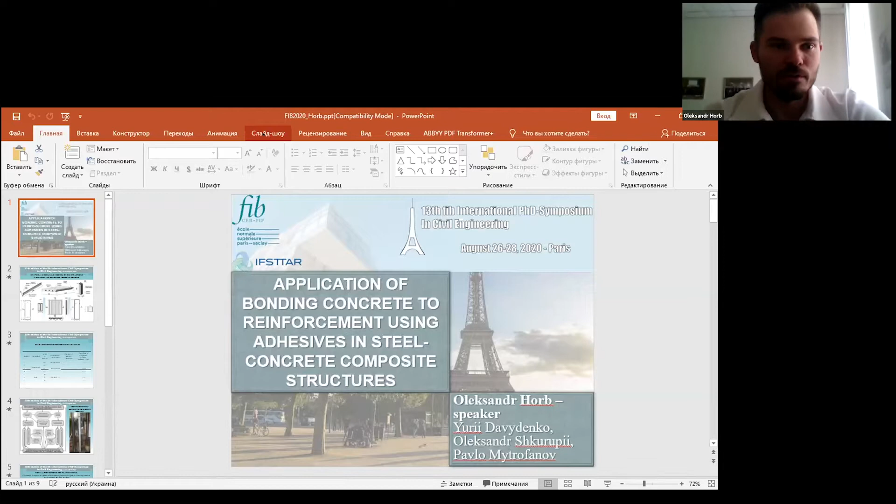And it's a big honor to show these results at such a big symposium, where many of my colleagues can see my results and maybe give some advice for the next research or give some comments on them.

The presentation is called application of bonding concrete to reinforcement using adhesive in steel concrete composite structures. My older colleagues have worked with steel concrete composite structures for almost 40 years. And at some stage, they had a big problem of how to ensure the joint work of concrete and steel in such types of constructions.

We know that in most cases we can use traditional anchoring, traditional external reinforcement or something like this. But it's a very big problem in modern constructions how to get this collaboration, ensuring joint work of such different types of materials as steel and concrete.

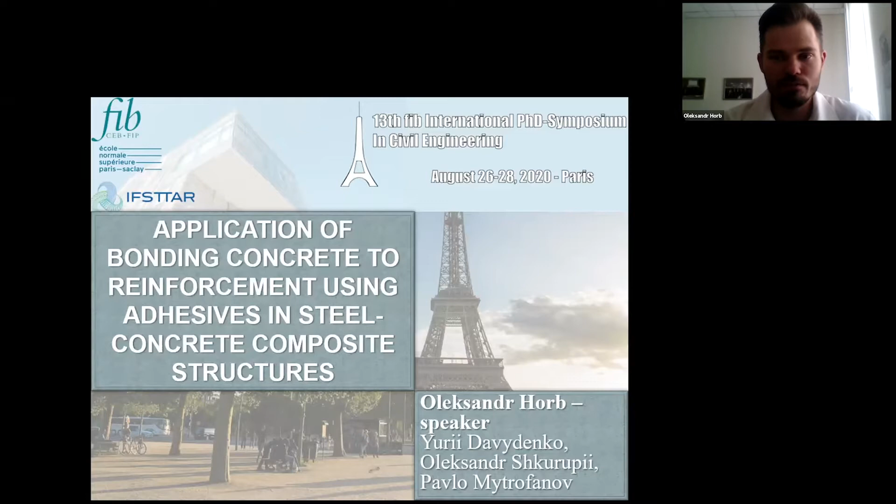Using research of our colleagues in polymer composite materials for different adhesives, we checked a few of them, acrylic and epoxy glues, for connecting. For many years our colleagues have used different adhesives for connecting steel and concrete in different types of constructions, but for ready concrete blocks and external or internal reinforcement, or for making some anchoring. But we tried to create such types of steel concrete constructions in which we can glue liquid fresh concrete to steel reinforcement.

We created three main types of steel concrete composite structures. We can see on the left side a double T profile, 2 meters long, with cavities filled with concrete. Before filling with concrete, we put some glue on the steel, and the next step was filling the cavities with concrete, gluing fresh liquid concrete. We didn't know which result we could get, and it was the first research of this type.

We didn't have any example in world practice of gluing fresh concrete to steel reinforcement. The best results we got when we glued concrete to profiled decking. We got good results; we will see them on the next slides.

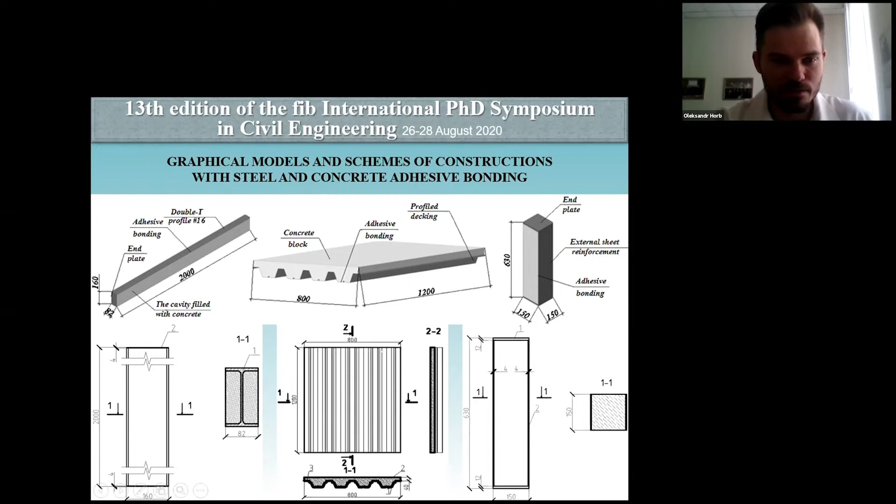And the third type of constructions which we produced were short columns, created from a concrete block and steel external reinforcement. Sizes and dimensions of all constructions you can see on this slide. We tested our constructions in compression and bending.

We divided our samples into a few series which differed from one another by the type of glue connection. In some constructions we don't have any type of adhesive connection, but in others we have some type of adhesive. We use acrylic adhesive, which contains three components: liquid polymer, hardener, and filler as quartz sand of some size.

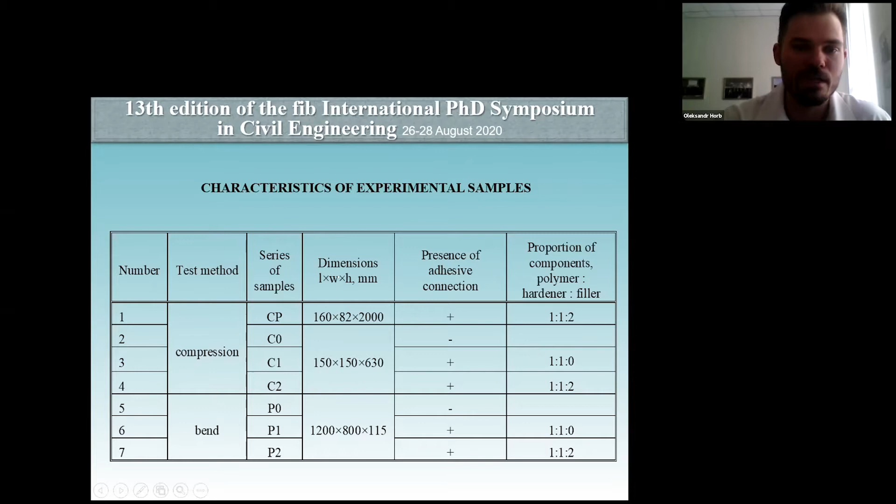I remember 0.315 millimeters. And we produced two types of glue in the proportions which we can see in this table. And the dimensions of samples we can see in this table too.

For all researches, we created a scheme of researches. We provided experimental researches on three types of samples, and then we produced theoretical calculations using different theories and modern and national documents, and decided that the most difficult part of calculations of such type of constructions is to describe the glutinous connection, to describe the adhesive using different equations.

It was the most difficult part in all theories, because according to Eurocode, according to national Ukrainian and Eastern European documents, we talk about ensuring work of steel and concrete on every stage of loading, but we can't describe the third layer in this construction as polymer, because polymer adhesive we can put in this construction having some thickness. It can be 3 millimeters or 5 millimeters, or in some constructions we tried, we put more than 10 millimeters.

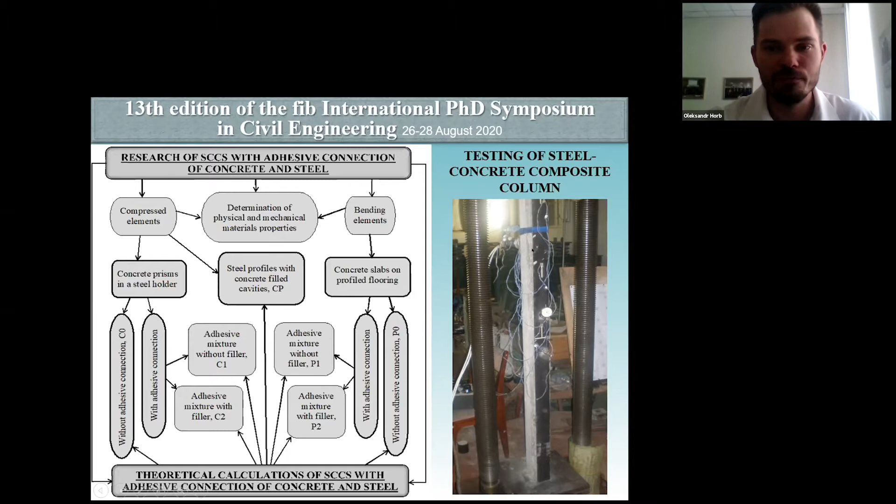You can see on the photo a column, double T column with cavities filled with concrete. And in this way, liquid concrete was glued, was adhesive to the steel part. The most important to us was to check the work of the profiled flooring slab, because we don't use any additional reinforcement in this way. We want to see on every stage the working of steel and concrete without any reinforcement. In this slab, we have only profiled flooring, steel profiled flooring, and concrete block.

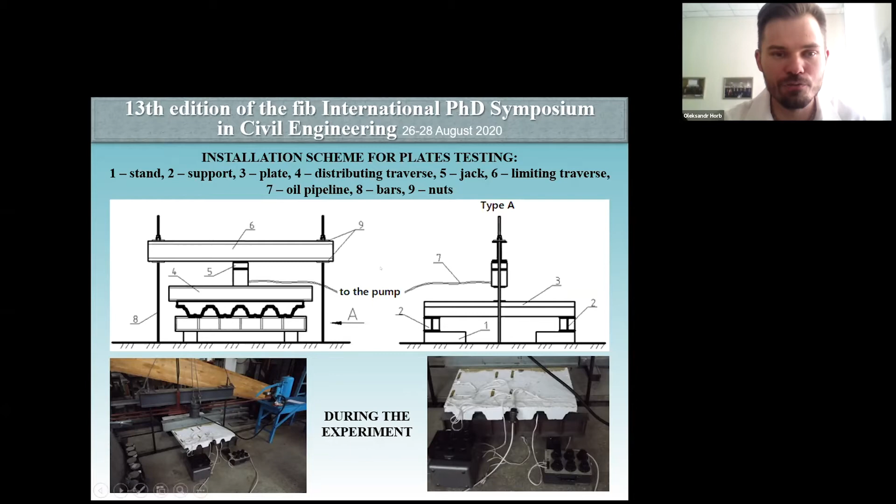And at the time of producing, we put a layer of glue equal to 3 millimeters on the profiled flooring, and then in 30 minutes we added liquid concrete to this slab, and after hardening of 28 days we tried to destroy this construction using such installation, because it was very difficult to put this construction in some mechanical press machine, because we couldn't find such, and we needed to produce some new installation for crashing this type of construction. And we got, I will show you, a very good result for this gluing.

We used some strain gauges for measuring deformations depending on load, and we can see that on each stage of loading, concrete and steel parts are working together, and the glutinous connection works even when we are gluing liquid concrete to steel reinforcement, and we try to prove that we can use this method of gathering work of steel and concrete in steel concrete composite structures.

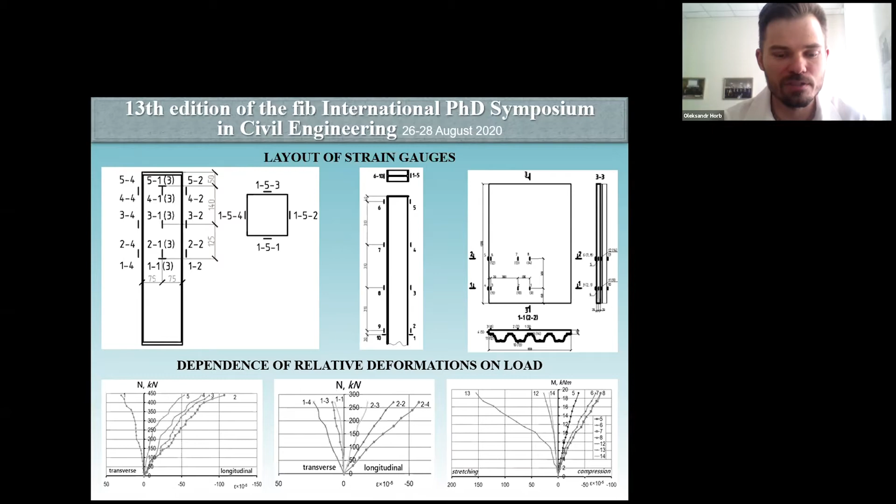As results showed us, if we talk about short columns, C0 is the column without glue connection. C1 is the bearing capacity of the column with adhesive without filler, and the most useful for such type of connection is the type of polymer with one part of acrylic, one part of hardener, and two parts of filler. And the best results we got with this type of glue.

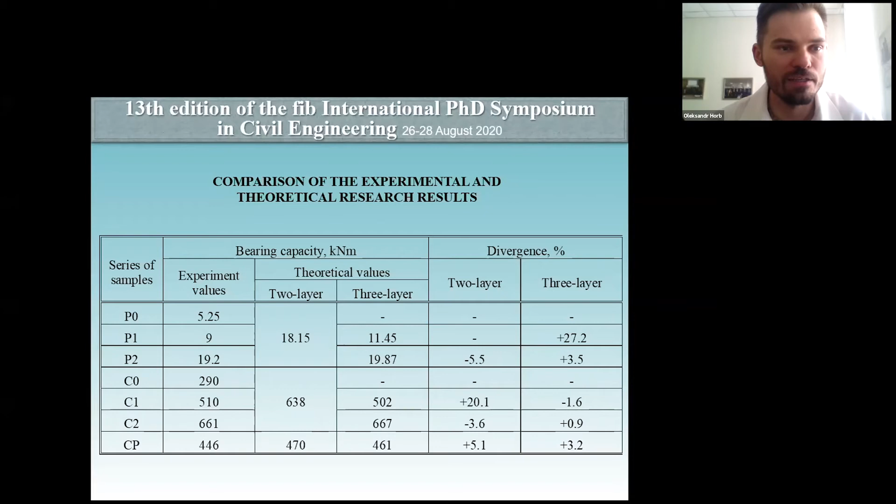I, of course, read your paper as well in the proceedings. I have a couple of small questions. Maybe I can start and other people can join. You correctly mentioned that there are some questions very important to clear up. First of all, the temperature influence, long-term influence and vibrations. The temperature influence is very, very important, because this application is typically for buildings, where we normally need 60 minutes of fire resistance.

My first question, and probably the most difficult question now: what do you guess about the fire resistance of this system, because the heat comes from the steel side, unfortunately.

One slab we left outside in the yard near our laboratory for 2 years. It was under snow, under bright sun, under rain, with water, with freezing, with unfreezing, and when we checked this slab, it was almost a miracle, but bearing capacity of the slab increased by 15–20% comparing with other slabs which we destroyed.

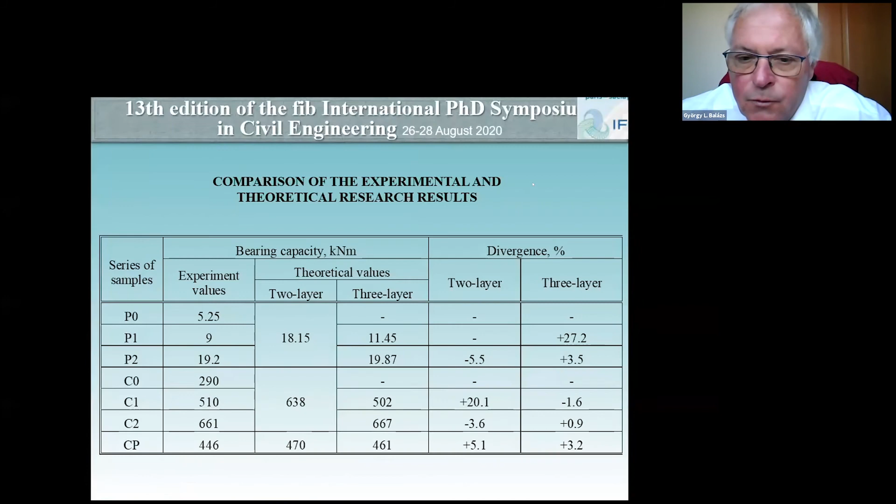Some small questions. We speak about force transfer in longitudinal horizontal direction, and in one of the last photos there was a slab with a separation, a delamination in the middle. So we have to speak about force transfer transverse as well. Do you have experience? Force transfer parallel to the steel and force transfer perpendicular to the steel. In this case, for example, the filler size could be very important. Do you have an opinion about these transverse stresses?

As I understand, you talk about moving of the concrete block separate from the steel. Yes. In this case, when we talk about profiled flooring, we can use profiled flooring with stamping, not with a very clear surface, but a surface with some stamping. And in this case, the area of connection between steel and concrete will be bigger, and sliding of the concrete block on the steel in longitudinal and perpendicular direction, I think, will be not so big.

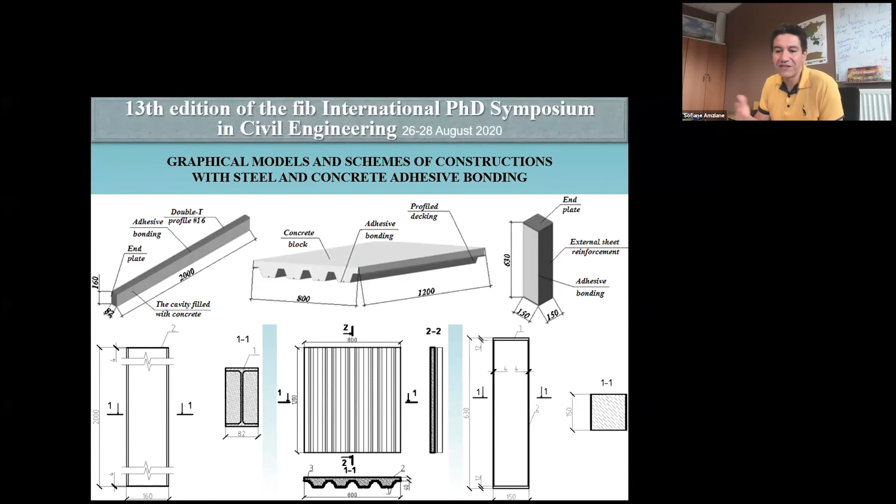Very nice subject. I have just two pieces of advice for you. You have to number the slides. There is no numbering of your slides, and it's very difficult then. Sorry. And also the diagrams, keep them as 2D diagrams, because you put them in 3D, but there is no need, in fact. Some diagrams are in 3D, but if there is no need to show something, I think 2D diagrams are enough.

About the question, the paramount of reinforced concrete is to have perfect adhesion between steel and concrete, naturally. But if you have a smooth surface, I understand that if you put a glue, you can increase the performance. But do you have an idea, if you have a rough surface, does the adhesive, the glue, increase the performance?

We checked a clear surface and a smooth surface. We used some abrasives to create a not so perfect surface for increasing the surface of adhesion. And the thickness of the layer is very important, because the characteristics of acrylic polymer are closer to steel, in bearing capacity and deformations between concrete and steel, and the acrylic layer can be like additional reinforcement for the steel concrete composite structure.

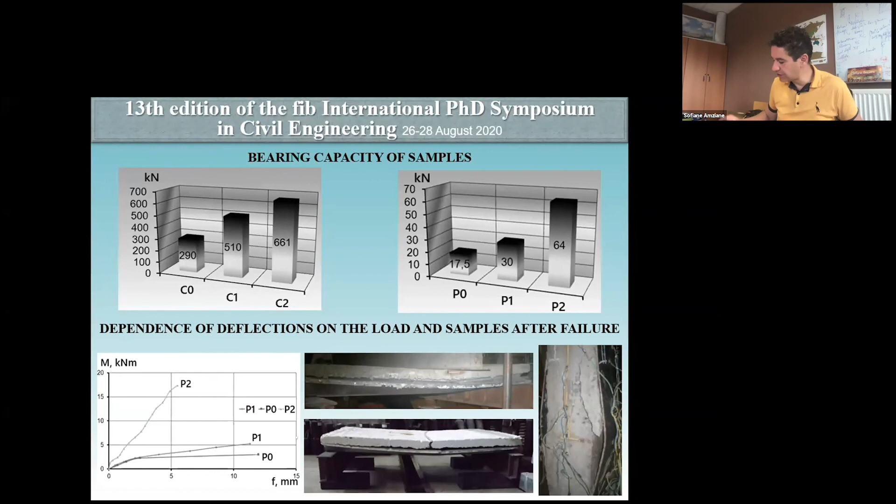But as a rule, you can use any type of concrete. The main thing is the type of adhesive. The adhesive is more important in this way. Okay, thank you for the precision. Thank you.

To show that the audience is allowed to ask, I should give one question from the audience. Was concrete cast in the liquid stage? If so, was glue applied on the steel prior to pouring? Sorry, but I don't understand. What does it mean, cast in liquid stage? So concrete was cast on top of the steel, and the glue was already applied.

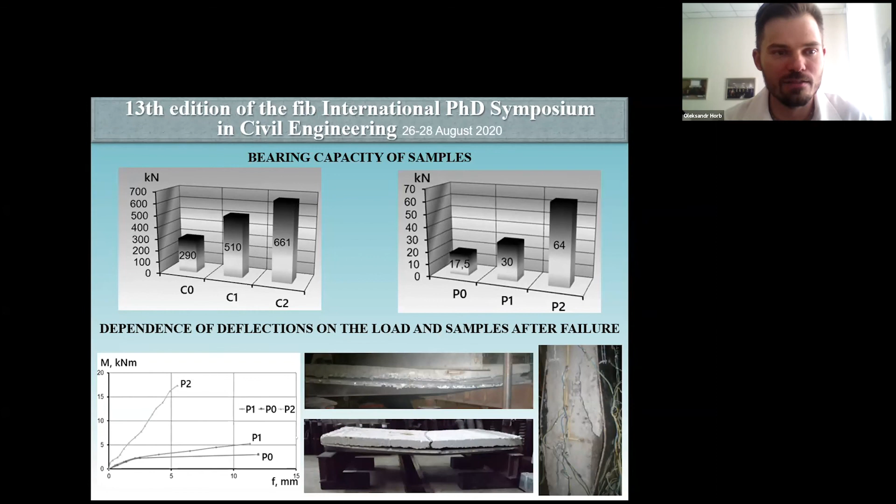I suppose. Okay, we have a steel surface. Then we put liquid glue on this surface. Within a period of about 30 to 45 minutes, we put liquid concrete on the liquid glue. And we have a chemical reaction between the glue and the concrete, and get a connection that we can't get using a clear steel surface and only concrete.